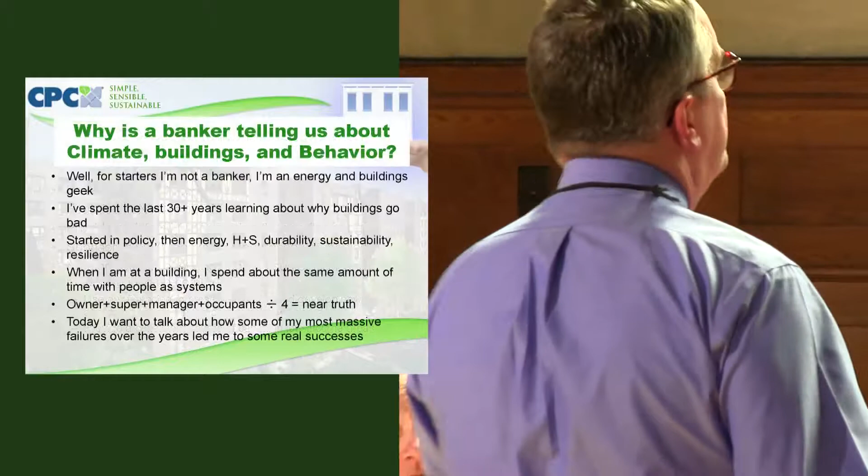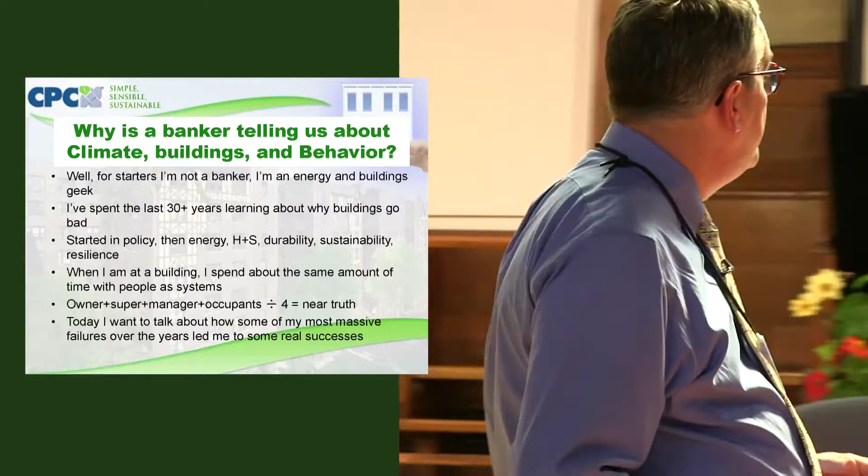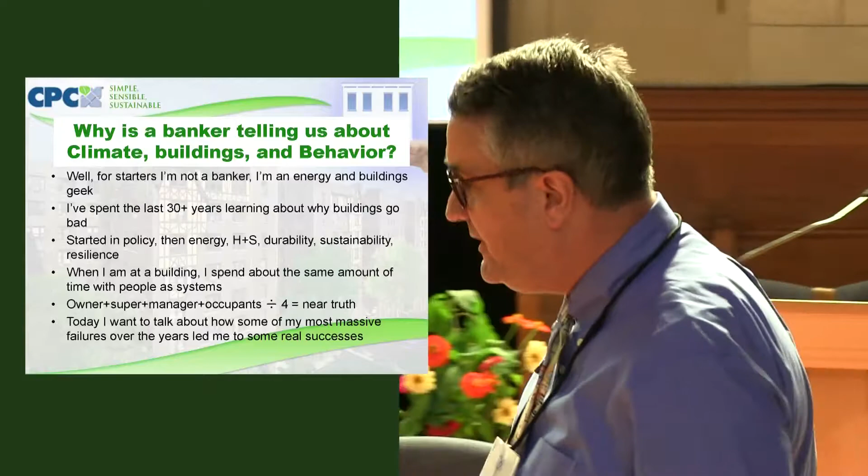So what's a banker doing here talking about climates and building and behavior? Well, I'm not a banker, I work for a bank, and everybody in the organization tells me I cannot call myself a banker. I've been crawling through buildings for about 33 years. I started doing stuff in policy for the city of New York, the mayor's office. I went from there to housing, and then someone started talking about health and safety. I said I can't do that stuff. They said, well, it's the most important thing we do. Then we went more into sustainability and durability. Now we have $60 million of Sandy money to spend, so I've got to learn resilience. It's been kind of beaten into me for the last 3 years by people.

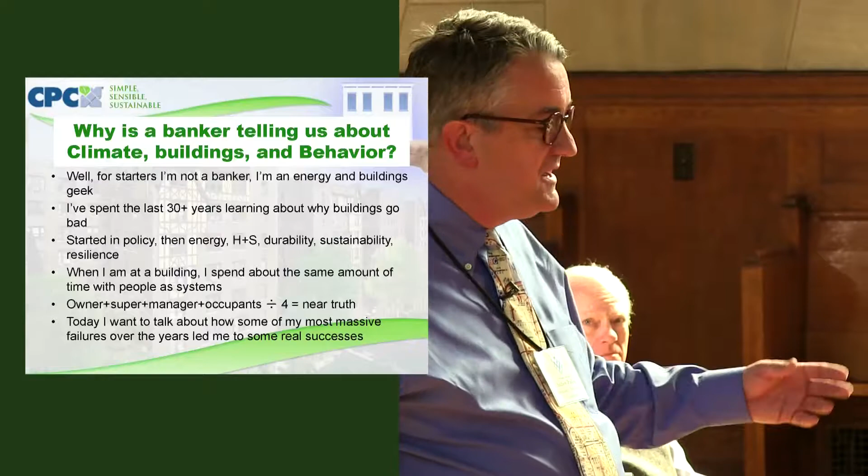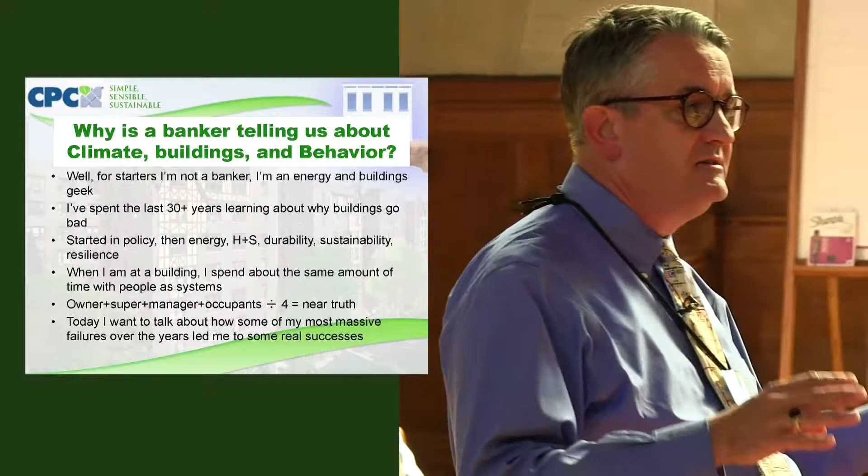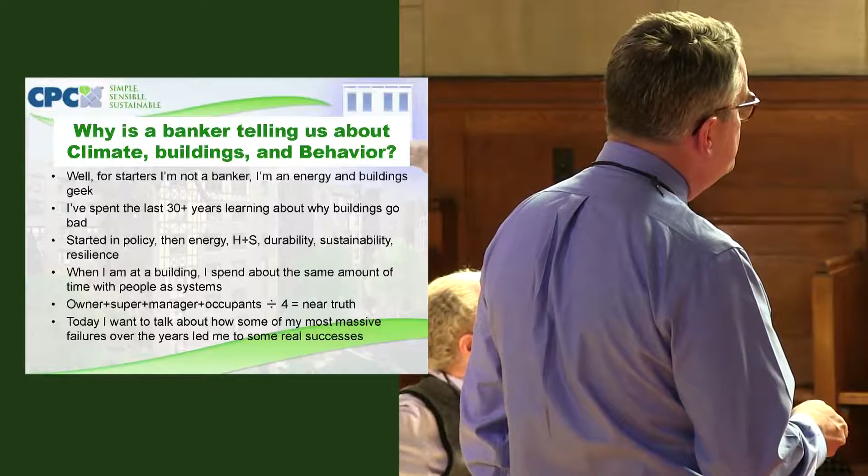So when I'm at a building, I spend about the same amount of time dealing with the building data as I do with the humans. I sometimes sit down with the humans at 10 o'clock in the morning and talk to them through lunch, because I want to find out what the owner, the manager, and everybody else is doing in the building. I find out that typically what the owner says, plus what the super says, plus what the manager says, plus what the occupants say, divided by 4, is pretty close to the truth. It's not really accurate, but it's not off by a mile.

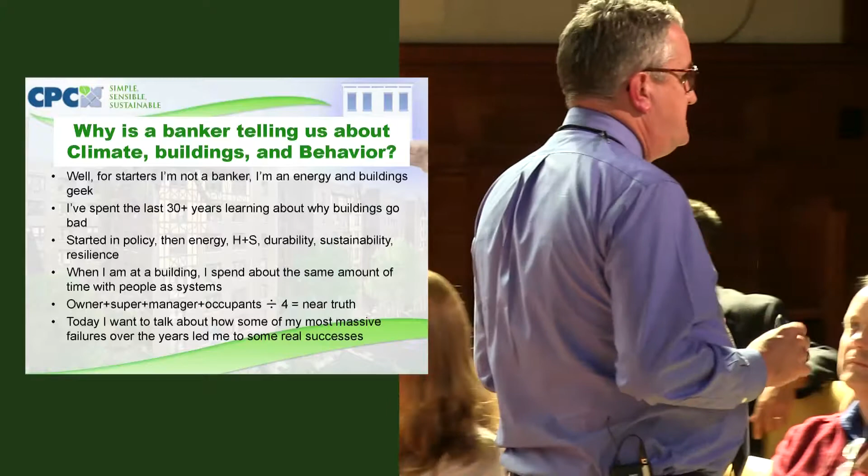So I want to talk to you today about some massive mistakes I've made over the years, and in doing them, how I learned to do things a little bit smarter. I've been communicating with owners and building managers and practitioners for over 30 years, and sometimes it's like dealing with the Three Stooges.

Owners want to know how objectively their buildings are doing compared to other buildings. If you tell them weird stuff, they don't want to know it. But if you can tell them that their next door neighbor uses half the energy that they do, they get it. If you ask an owner what they want, windows, they say, I want windows, and I want cash. The programs should just give me the cash I need, and I'll do the smart thing.

Don't worry, I know. They also want solar panels, ground source heat pumps, windmills, and things that have a 10 to 900 year payback. And they don't want to focus on the boring stuff, what one person called it to me one time.

So they need to be gently walked through their buildings. Like at a building on Central Park South that faced north and had a 30-story building behind it, the co-op board told me, I want solar and I want ground source heat pumps. I'm like, you've got steam, we've got to drill down to magma. They just don't get it. So we have to gently walk them around.

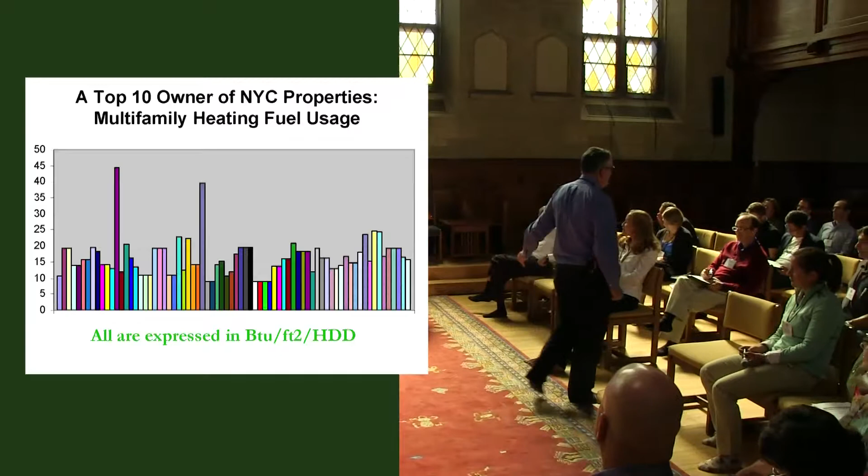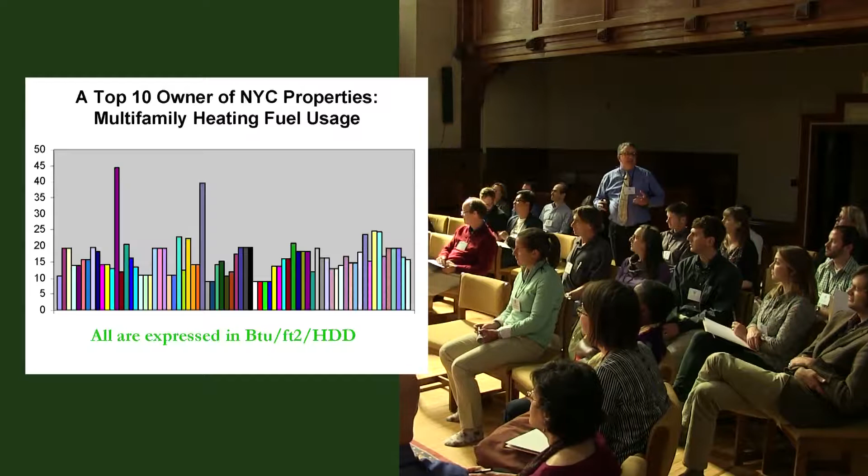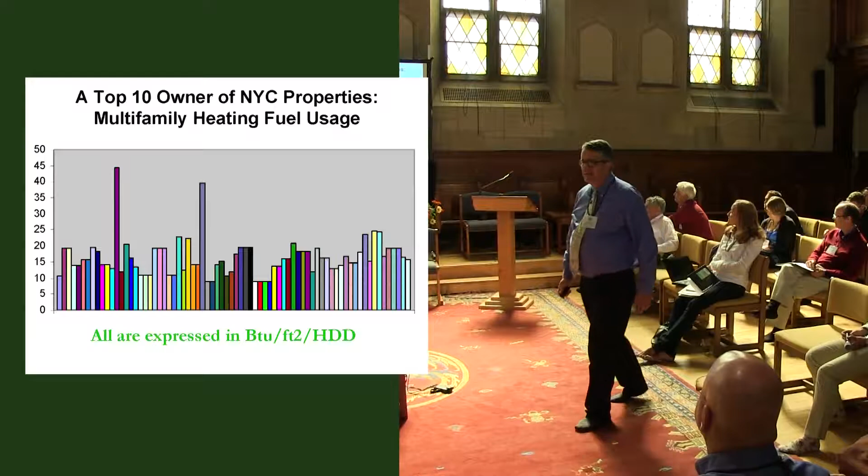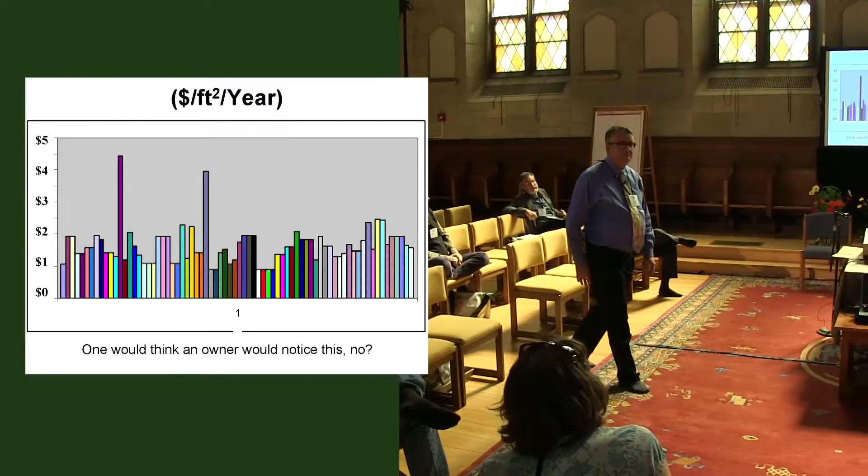This is one of the largest owners of property in New York City, and each one of these is just their multifamily buildings. Who is this owner? If you already know, don't answer. Guess. Someone said NYCHA -- good guess, not correct. It's not the city of New York. You know the answer, quit cheating. It is not related. How many people in this room went to Columbia University? Raise your hands. This is Columbia University. These are their multifamily buildings that they get green plaques all over, saying how fabulous their buildings are. Their buildings are pigs, because we looked at them.

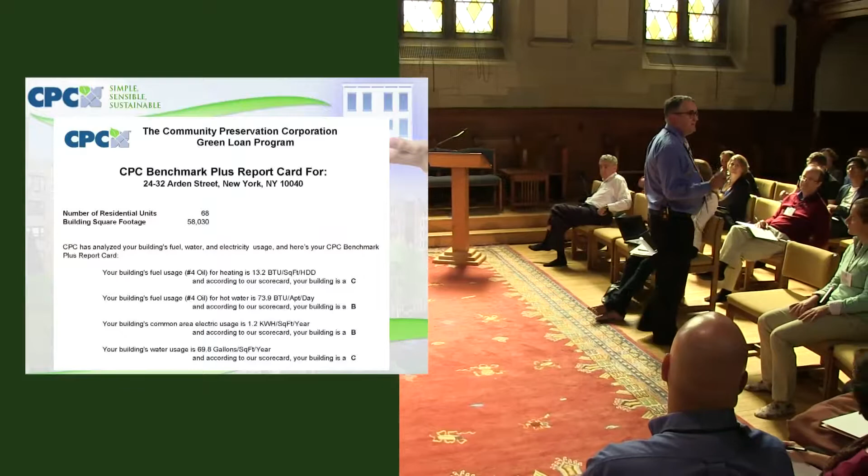I have a mortgage officer in my bank who said to me, if you say BTUs per square foot per heating degree day to me again, I'm going to kill you. He said, my kids come home and they give me a report card. Give me a report card. Tell me how I'm doing. Give me a grade. And so we gave grades.

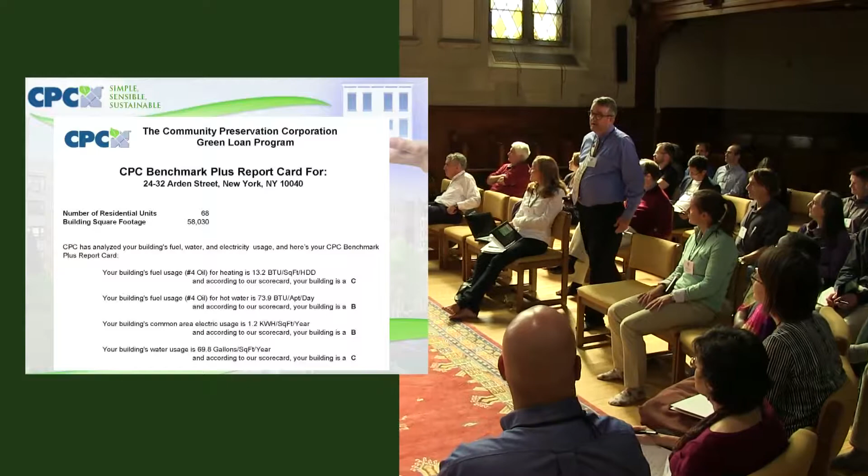When we analyze a building's fuel use, we give them this. It tells them their heating usage is a C, their fuel usage for hot water is a B, their common area electric usage is a B, and their water usage is a C. We're comparing them to thousands of similar buildings in New York City. And they get these grades and say, why did I get an F? Because your building isn't doing well.

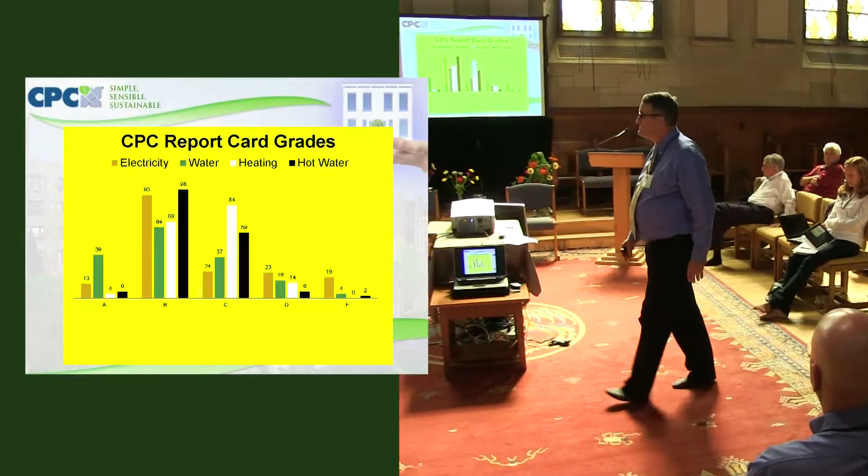Then we did benchmarking through the city of New York, Local Law 84. This is the results from 150, 200 buildings. Guess what? It's just like a curve. There's not many A's, there's a bunch of B's, a bunch of C's, a few D's, and a bunch of F's. This tells a building how they're doing.

So unless you let them know how you're doing, they don't have that feedback loop.

Feedback loop number 2: what goes on at a building in a typical day? Or, as I like to say, the beauty of an 8 a.m. building stroll with a clipboard when you have a 10 a.m. appointment with the owner. When I walk around a building 2 hours before the owner gets there with a clipboard, everybody comes out to talk to me. Who are you? What are you doing here? What can you tell me?

What's going on? The owner's a dirtbag. You hear everything. You hear about his wife. You hear about his father. You hear about his kids. You hear when the heat's off, what's going on. You get so much information.

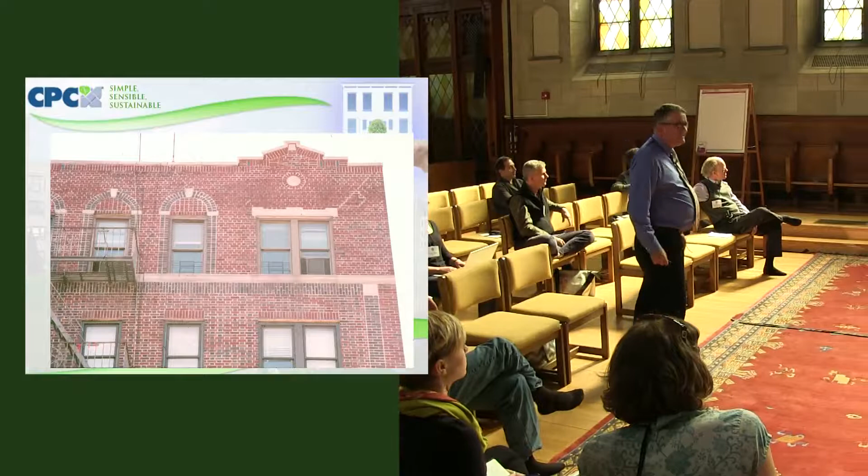And I collect all the data from the building. I measure the building, I measure the windows, I see what's going on. I see this: it's 20 degrees out, and not only is the window open, but there's a screen in it. I'm guessing they keep that window open a lot. These are the things you see.

There's 6 inches of snow that fell last night, but it's already melted on the roof vents, which are, by the way, designed to vent insulation, which is stupid. It's just a hole at the highest part of the building and probably vents most of the heat out of the building. That's just physics, and I don't want to confuse us all with physics today.

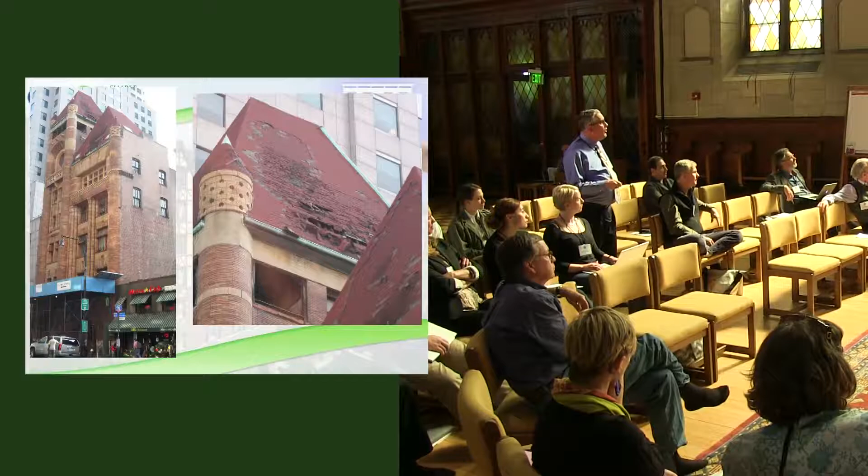You go to this beautiful historic building in Brooklyn that was the original firehouse, built to look out over the entire borough to see if any buildings were burning down, and this beautiful historic building is completely falling apart. All of the roof is going, and nobody looked at that.

You see a building near Fordham University, a beautiful building, but not only is the roof completely falling apart, as you can see on top, but again, on a cold winter day, all the windows are open on the top floor. People still have air conditioners installed in their apartments because that's the way they correct overheating, by opening the windows or turning on the air conditioner.

There's an emergency steam boiler in front of the building. They've been without steam, without a boiler, for 1.5 years and haven't fixed it. Yeah, that kind of jumps out at you.

So here's feedback loop number 3. Spend lots of time looking, talking to the staff, talking to the owner, talking to the tenants, talking to the manager, recording the data. But after you do something, get results.

I was always so impressed with myself. Oh, we did such great work. And then you go back to the buildings 3 years later, and we saved nothing. Well, why did we save nothing? We have to go back and find out.

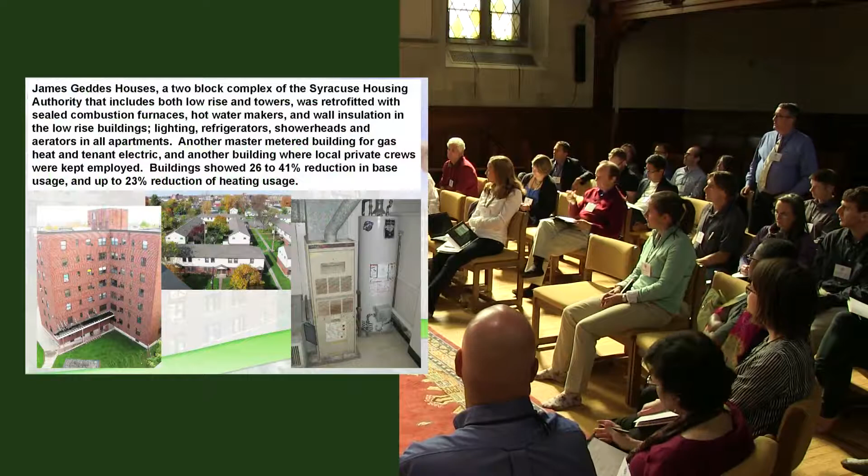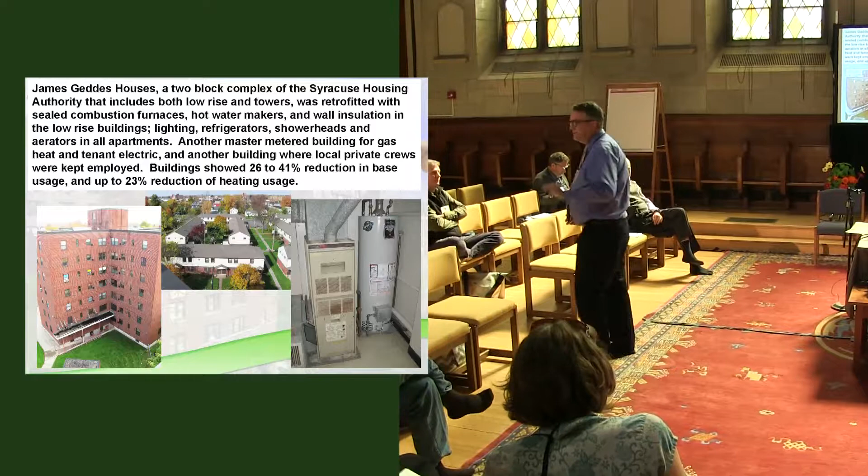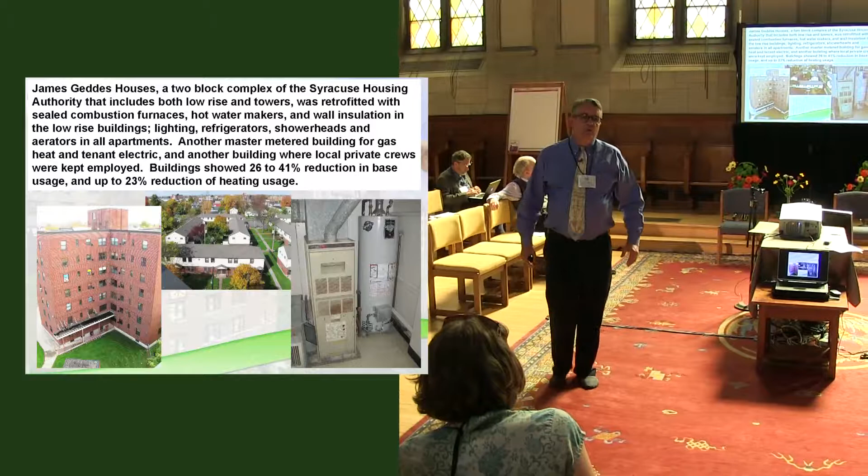So these are some buildings I want to show you quickly. This is the Syracuse Housing Authority. This ain't rich folk. We walked through this building with the Syracuse Housing Authority staff, crack staff — and I don't mean smoking crack, I mean really, really good at what they know. This is a 2-city block with big towers and little low-rise buildings, old furnaces and old hot water heaters. So we started walking around and seeing what we wanted to do.

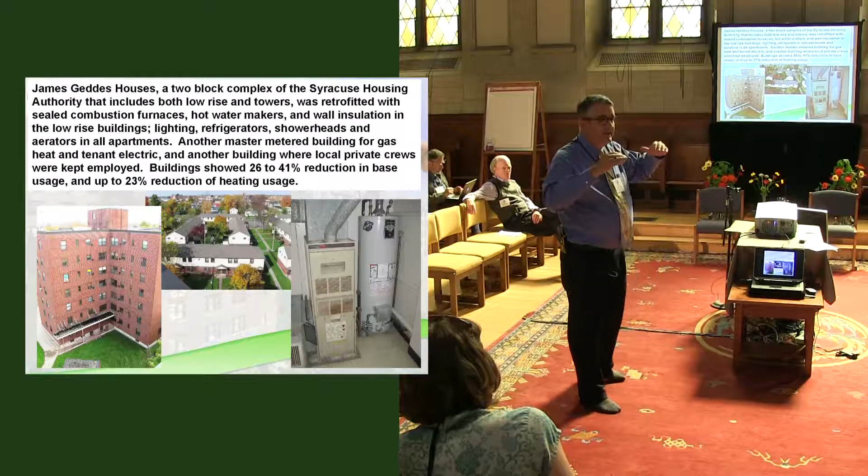So of course we're going to do new furnaces with sealed combustion, new hot water makers with sealed combustion, and wall insulation only in this upper part of the building. A person from the state came through because I saw this part of the building was brick, and I assumed it was brick behind, but they said no, it's frame behind there. So we insulated the upper half of the building. Maybe it's not perfect. We air sealed the attics.

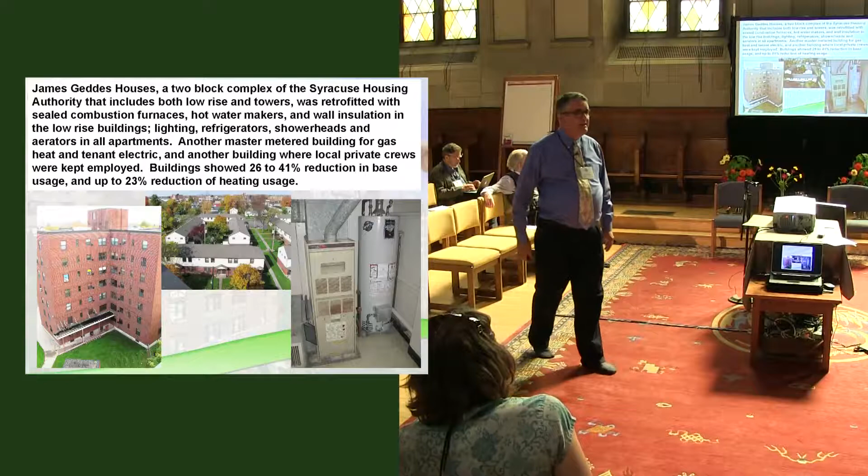We added insulation there. Again, this building is master metered for gas and electric for the entire block, so we don't know how individual buildings are doing. But we saw a 26 to 41% reduction in non-heating usage and a 23% reduction in heating usage in these buildings, doing a pretty inexpensive retrofit.

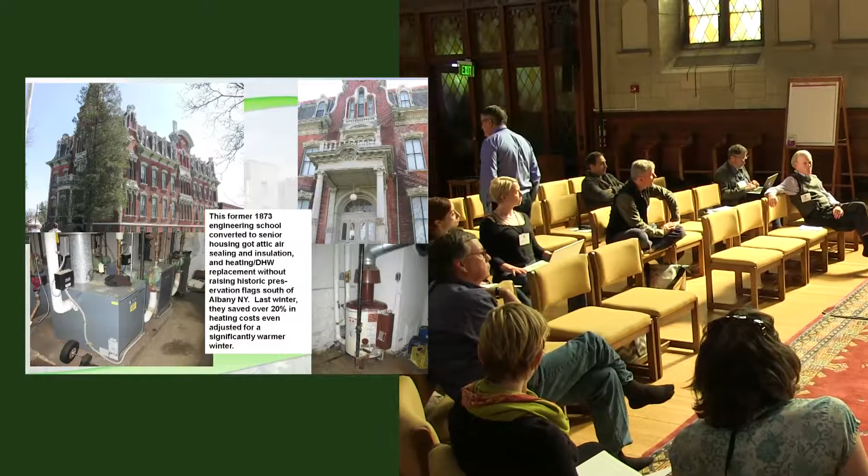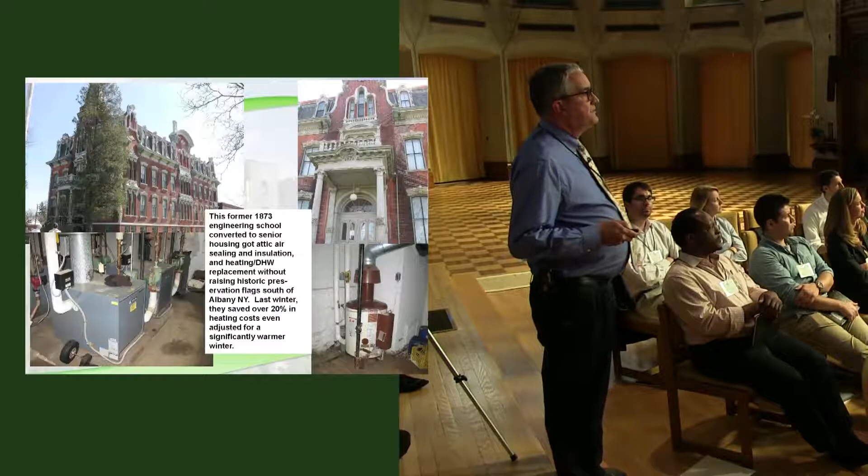People tell me you can't do anything with historic buildings. This building was built in 1873. It's an engineering school just south of here, built by a guy from Wall Street. For the record, people from Wall Street can't run schools. This engineering school went under in about 20 years, and everybody that grew up in this town went to 4th through 10th grade in this building. It's beautiful.

But the attic had never been insulated, ever. So we walked up into it, and I thought the New York Ballet Company had been through it, because it didn't have blown insulation, it had thrown insulation, just in places wherever they wanted to go.

So we had the attic air-sealed and insulated for the first time, and we replaced these boilers, which are called atmospheric gas boilers, designed by Satan himself. And whenever you see an atmospheric gas hot water heater, also designed by Satan, still specified by engineers, take them away.

We got 20% savings in this building by changing the boilers, insulating the attic, and walking away. And the historic preservation people said, you're not touching anything that makes us unhappy. You're fine, go. They were perfect with us. So historic buildings work.

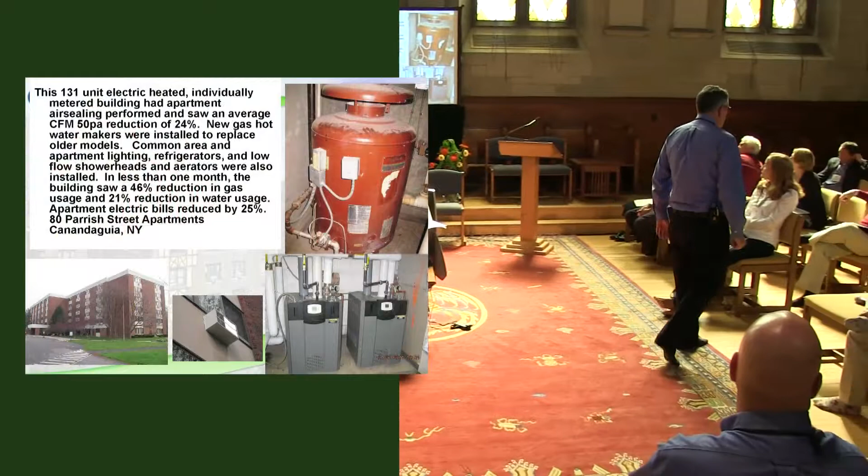Electrically heated, multi-family buildings, cold climate. Remember when they told us electricity was going to be too cheap to meter? Well, they were wrong. So there's electrically heated buildings all over the United States.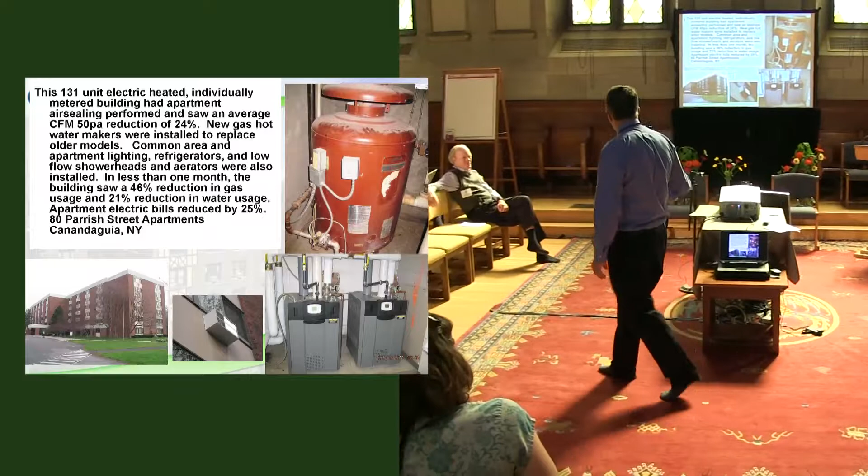This one had only gas for hot water, and they had this hot water maker, which was designed in 1940 and still used today. One of them died, and they put the exact same one in, because the rule is, in HUD and many other groups, replace with same.

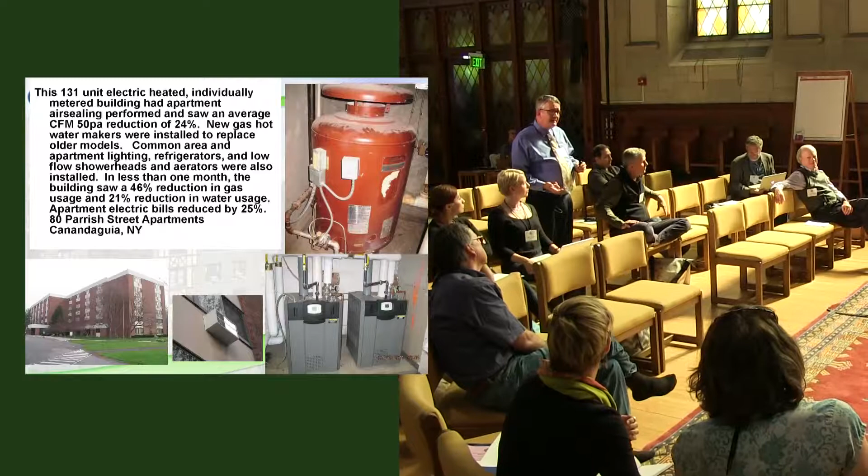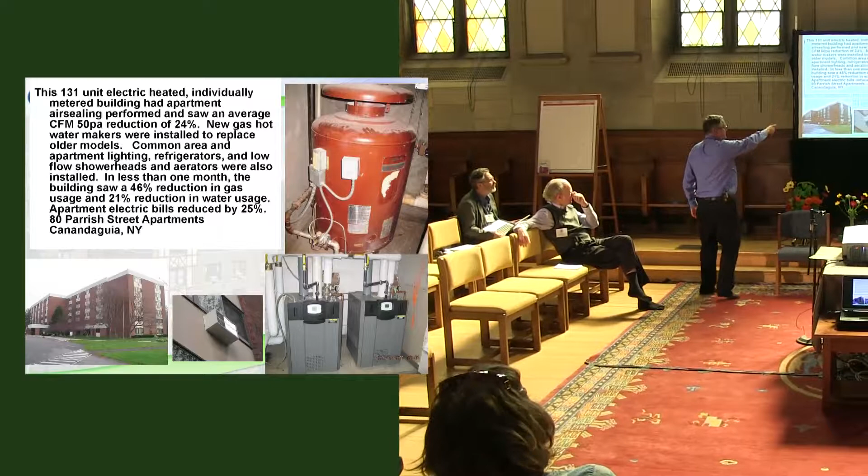It's like when the new iPhone comes out, do you get rid of your phone and get a rotary phone instead? Is that cool? I want people to start looking at the coolest thing to put in. We went from this water heater up here in the upper right corner to the super efficient ones in the bottom right corner.

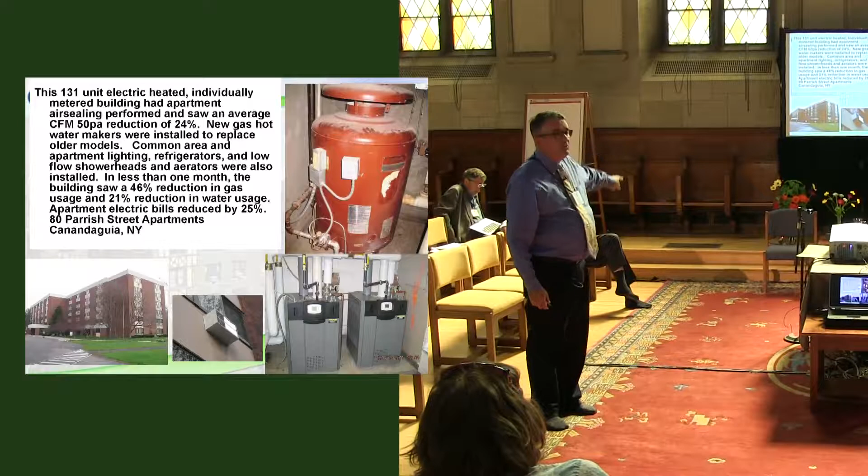46% reduction in gas in one month. And all we did was those two boilers, shower heads, and aerators. That's it. We had a 21% reduction in water, and we didn't do toilets. That's big money for this building.

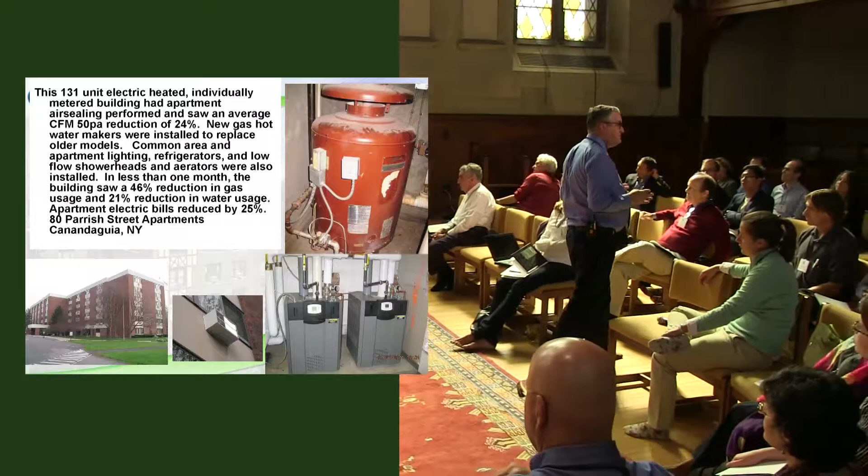We went in and put a blower door on every apartment, and we tightened every apartment on average by 24%. Their electric bills went down by 25%. I asked the inventor of the blower door, Gary, can we say that reducing air leakage by 25% saves 25%? And he said, of course you can.

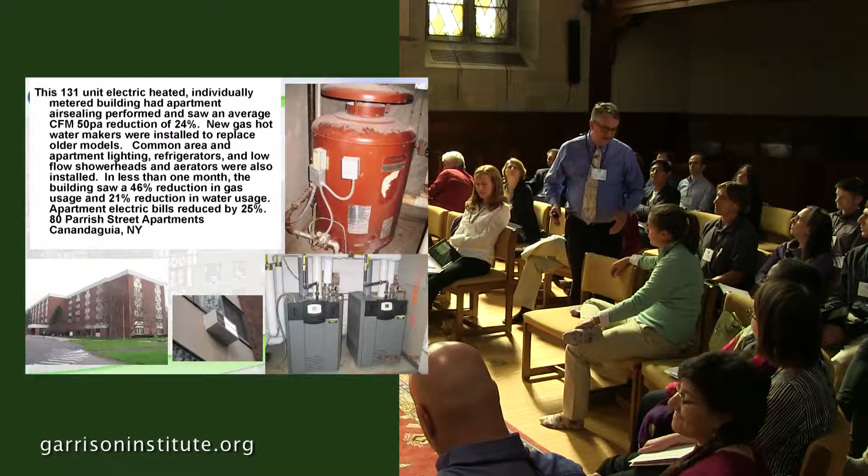And his scientific person next to him said, no, you can't say that, that's complete BS, don't say that. But it makes a difference.

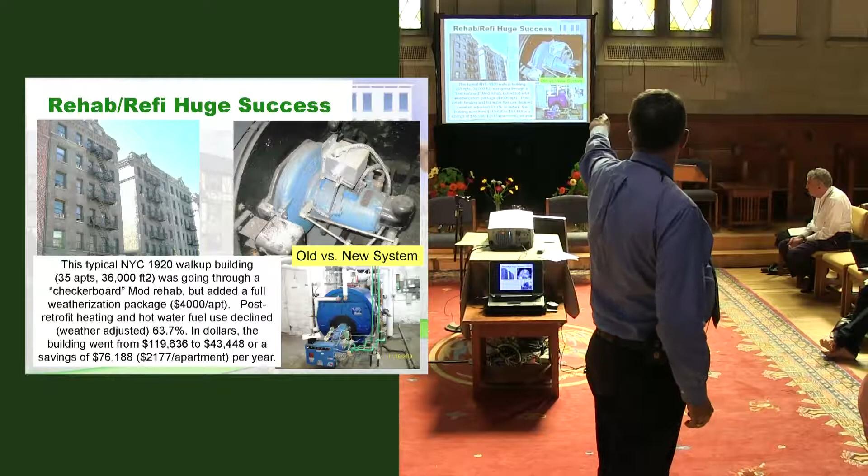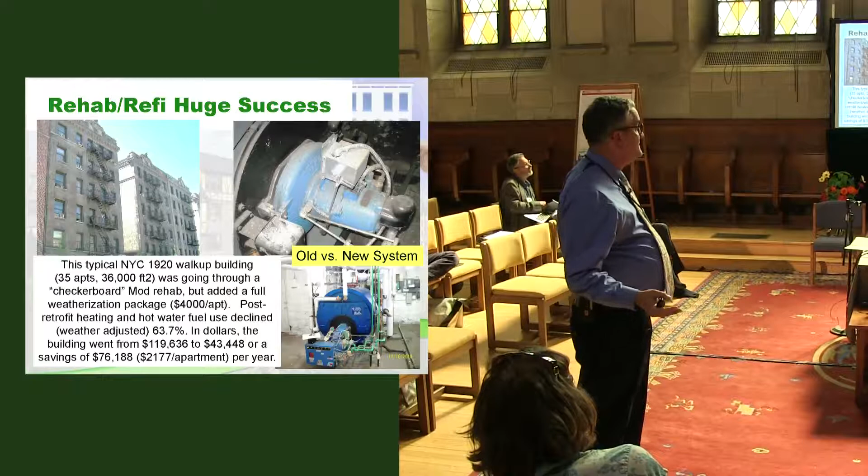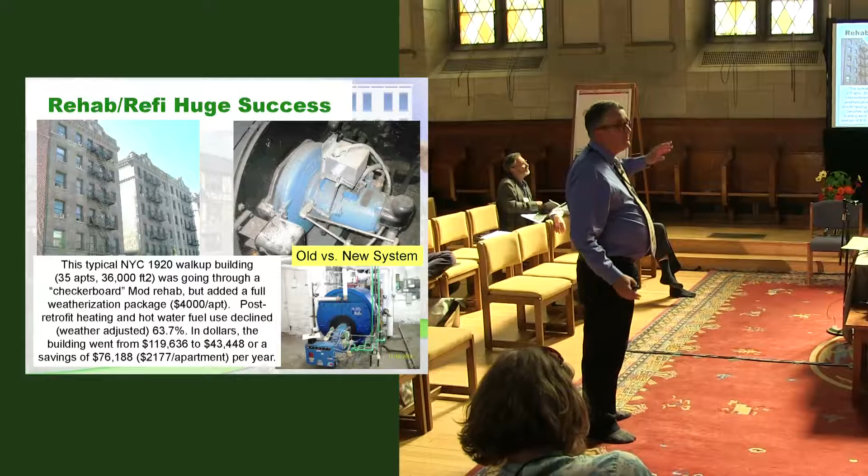I work for a bank. This is a refi job on a walk-up 1920 building in Upper Manhattan, and we brought in the local weatherization agency, the greatest weatherization agency in all of the United States, the greatest weatherization director, Dan Reber, Northern Manhattan Improvement Corporation. They walked through, and while we were doing the checkerboard rehab, they air sealed the apartments, put a new boiler in, put new windows in, installed right - they weren't cheap windows.

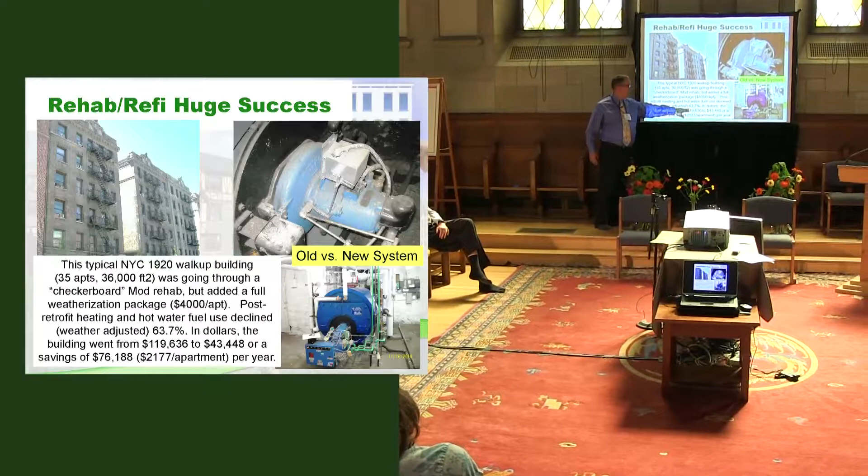I've got to show you this, because it's a real number. Heating and hot water fuel declined by 63.7%. In dollars, the building went from $119,000 to $43,000, a savings of $76,000, over $2,000 an apartment, on a $4,000 per apartment investment. If this wasn't a weatherization job, it would be called a deep energy retrofit.

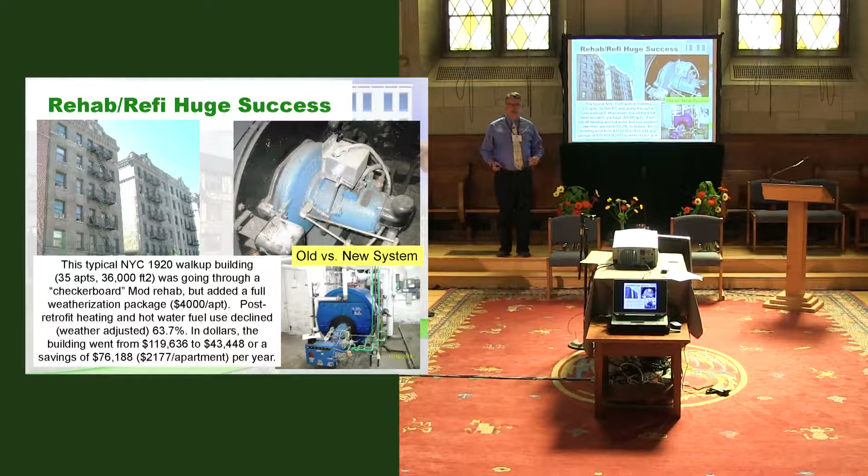It was a refi. And I work for a bank, and we think it's a really smart idea that when you refinance the debt on a building, that's the time you make the plan to do the energy stuff. Because that's when the wallet is open. When the wallet is open, do it.

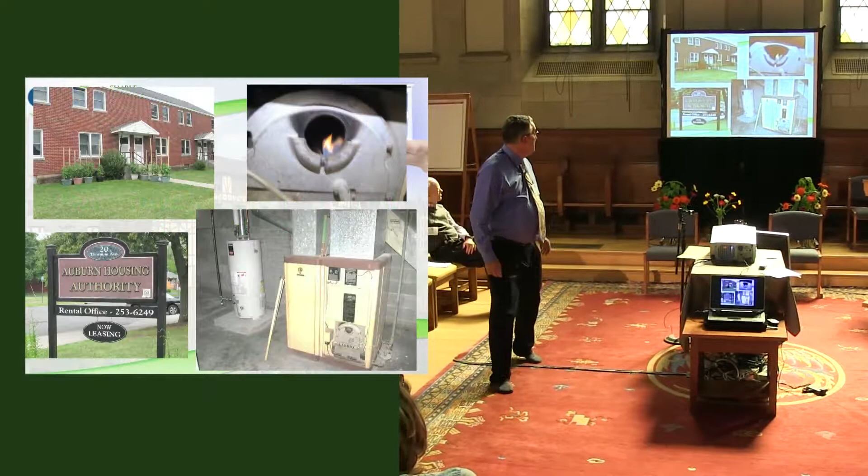But I don't want to talk about those buildings. I want to talk about the Auburn Housing Authority. Auburn, New York is one of the most beautiful cities in the world. It's in the middle of nowhere between Syracuse and Rochester, New York. It's gorgeous.

We walked through the buildings at the Auburn Housing Authority, and there were the original furnaces. They weren't hooked up to the return ducts at all, but they were hooked up to the supply duct. So they sucked air from the basement. They probably also sucked carbon monoxide and delivered it to people, but that's just technical stuff.

Who cares? If you look in there, that's the pilot light for this thing. I could have lit three cigars at once with that pilot light. It's gigantic. The buildings were built in an architecture style called early modern Eisenhower bomb shelter. That's this right here. Those of you that are elderly architects, you're responsible for this, and I don't forgive you.

Now, two days after a rainfall, I went into a lot of basements and saw wet basements. Well, upstate New York, I went to school at Syracuse, it's wet up there. Does anybody see something here that makes you think why you have wet basements? Anything that jumps out at you?

See this? The buildings don't have gutters. Nobody ever put them on in 55 years. Come on, that's easy, even I can figure that one out. So we wanted to do gutters. At 188 units, 31 buildings, but one gas meter, one electric meter, one water meter.

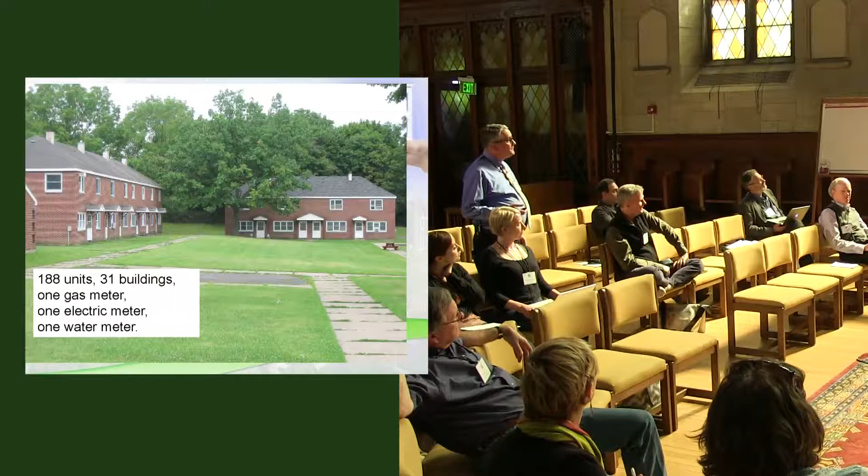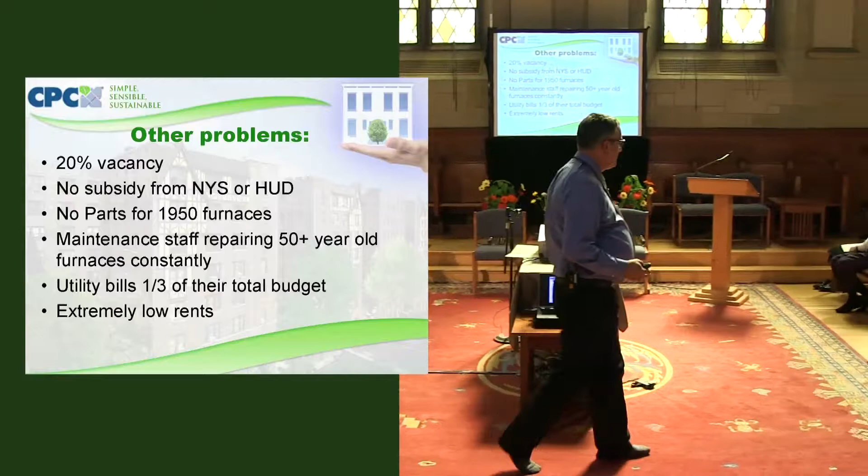And we put together what else was wrong at the building. 20% vacancy in a place that desperately needed affordable housing. Well, why was it 20% vacant? The place was a mess. Their energy bills were a third of all their financing. They were supervised by both HUD and the New York State Division of Housing, and neither one gave them subsidies. So they had to jump through all the hoops with none of the money, literally zero.

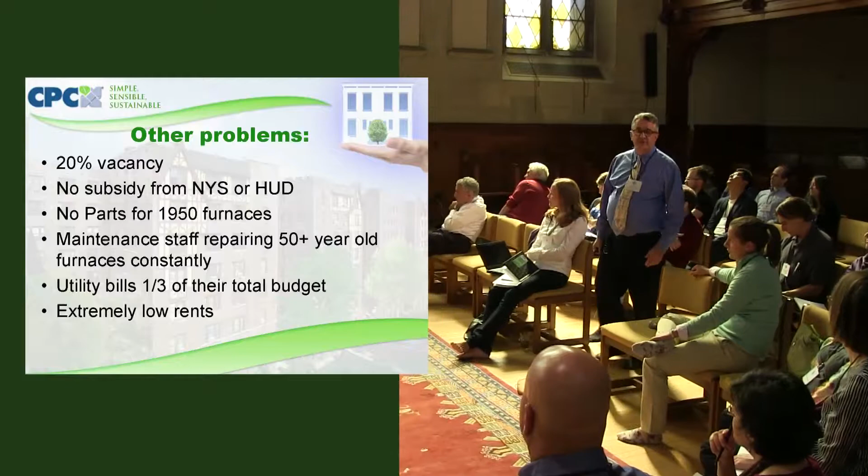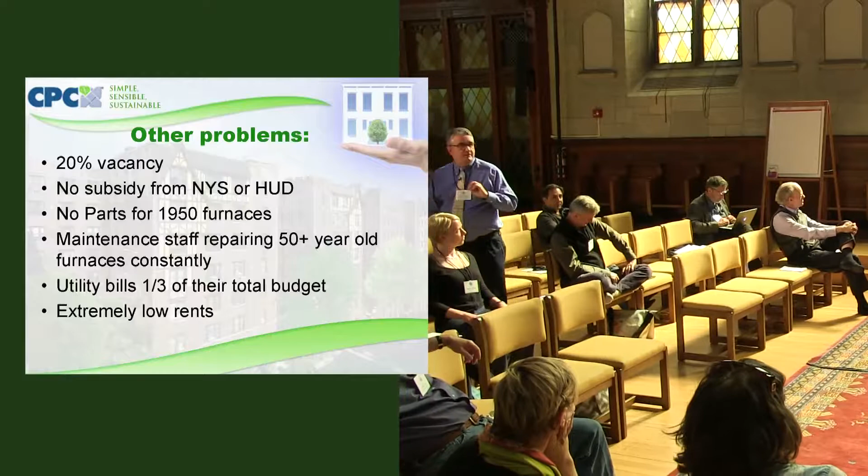The 1950 furnaces didn't have parts anymore, so they couldn't find them. The maintenance staff spent a large part of their time making parts for these 50-year-old furnaces to make them work. And again, extremely low rents and 20% vacancy.

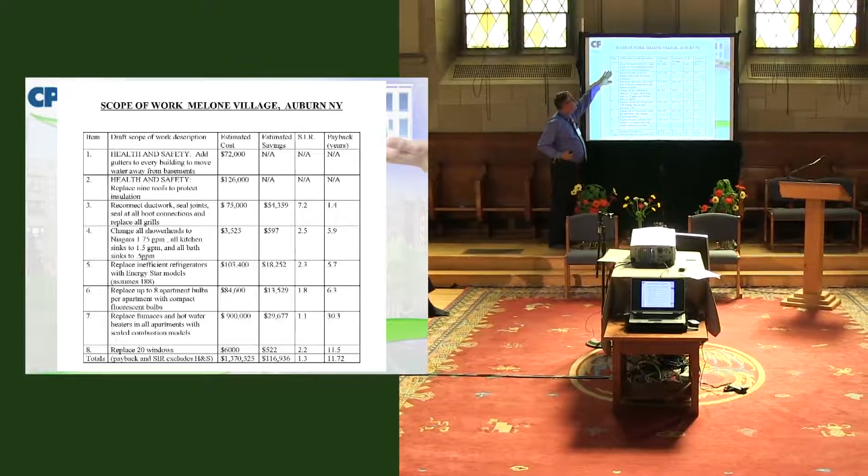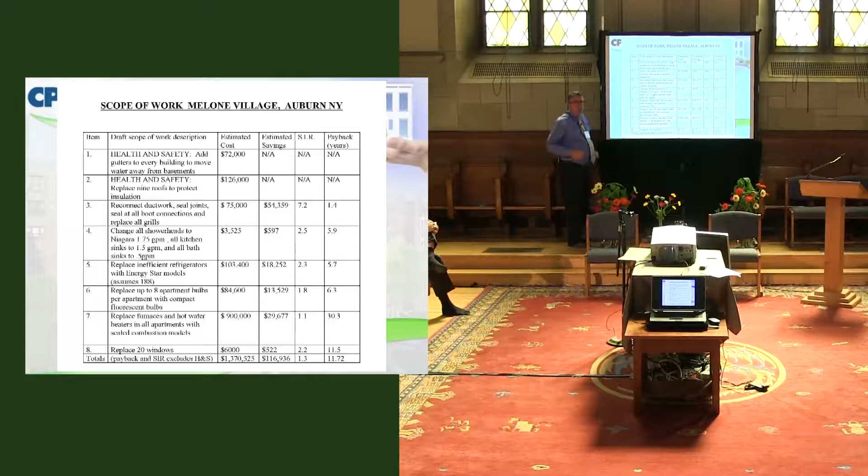This is as big as I could make this. But our scope of work, this was a weatherization job. We had a weatherization program, we were a bank that ran a weatherization program when the ARRA funding came in. So we said, add gutters, replace 9 of the roofs because they were leaking, reconnect the ductwork, change the shower heads, refrigerators, apartment bulbs, new furnaces, hot water heaters. And those of you that know cost effectiveness with weatherization, we got a savings to investment ratio of 1.1, investing $900,000 to replace 181 furnaces and 181 hot water heaters.

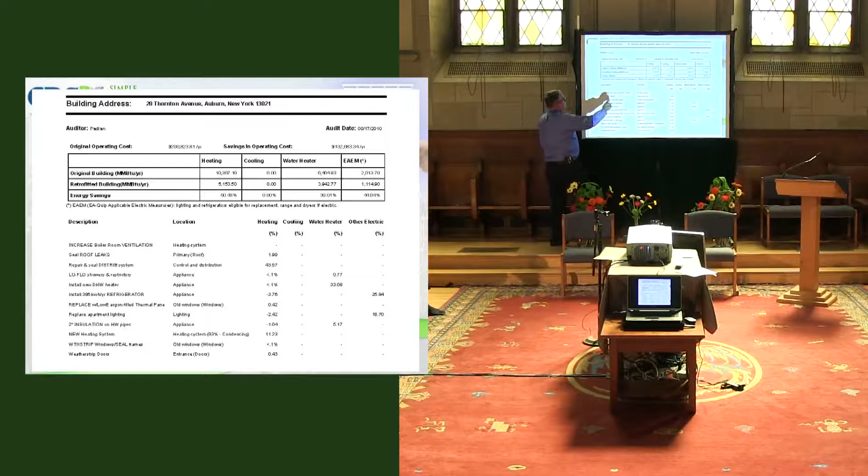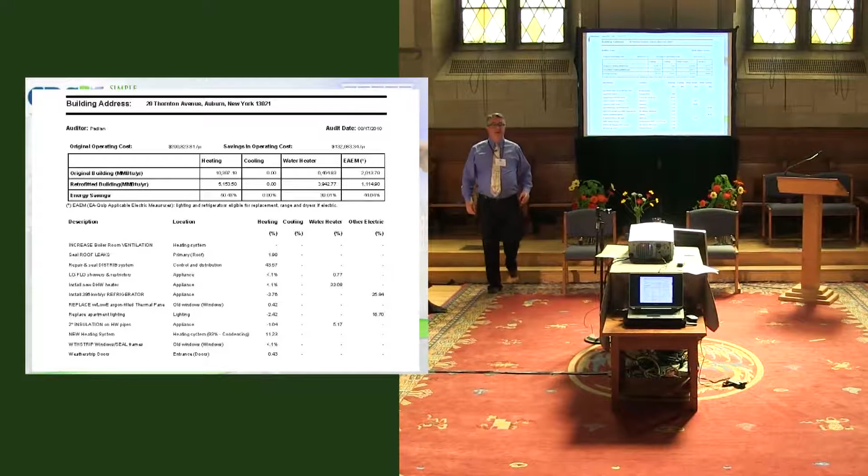Here's the scary thing. I finished the audit, and the building is actually pretty efficient. It was running at about 12 BTUs per square foot per heating degree day, but they told me we were going to reduce the heating usage by 50% and the hot water usage by 40% by doing these things. And I would not show these numbers to my supervisor because he's not with the company anymore. Because if we didn't reach those numbers, he was going to fire me. And he told me that.

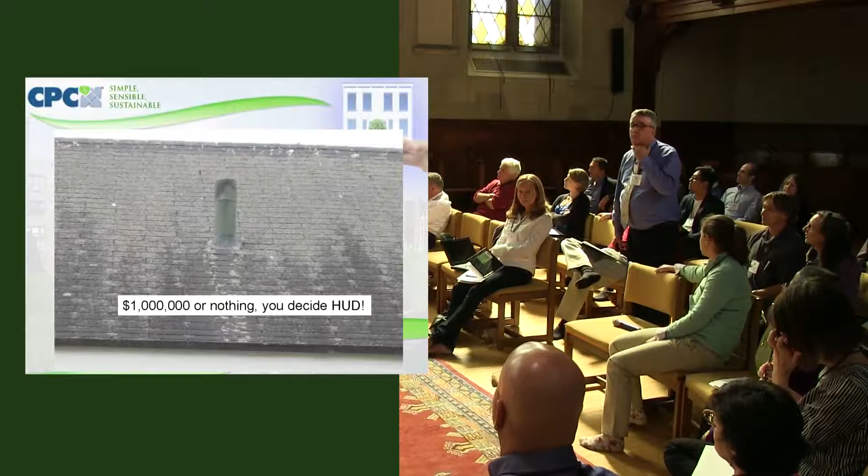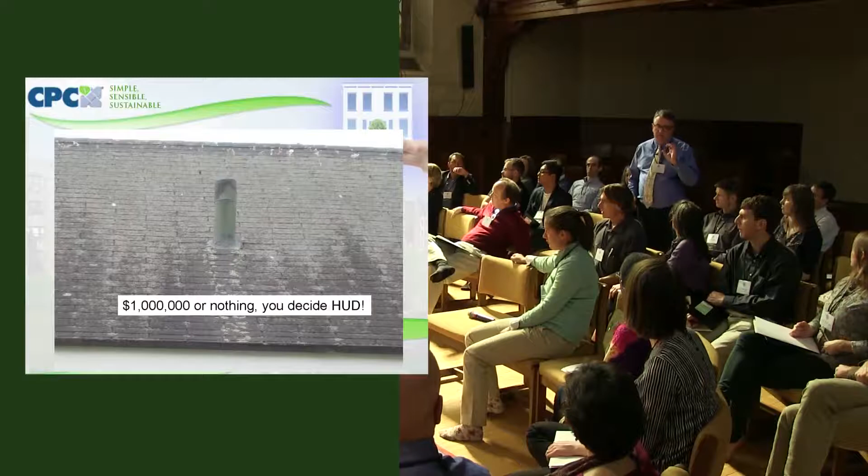The roofs were in terrible condition. And HUD wouldn't let the Housing Authority release the money that they had to replace the roofs. So we went to HUD's office in Buffalo, New York, and we said, okay, you either allow them to use the money that they have put aside to replace these roofs, or they will lose $1 million. They wrote the letter in two weeks. That's a record. For those of you that work with HUD, that's record time. So we said, it's either $1 million or nothing. You decide. And they moved.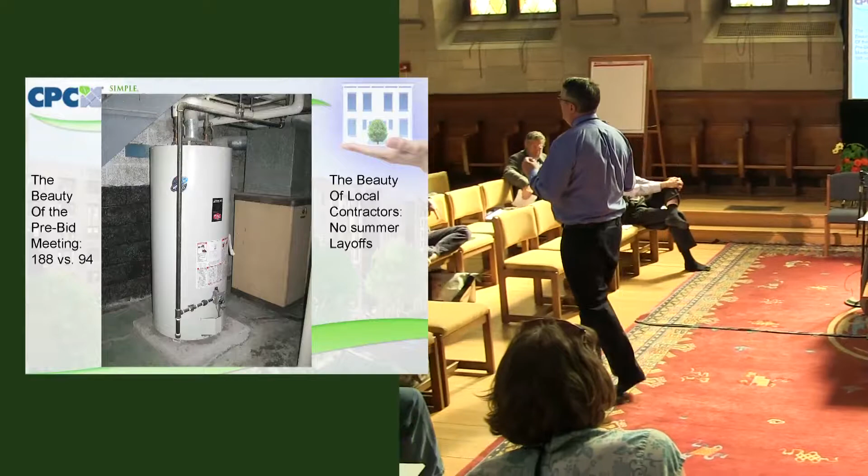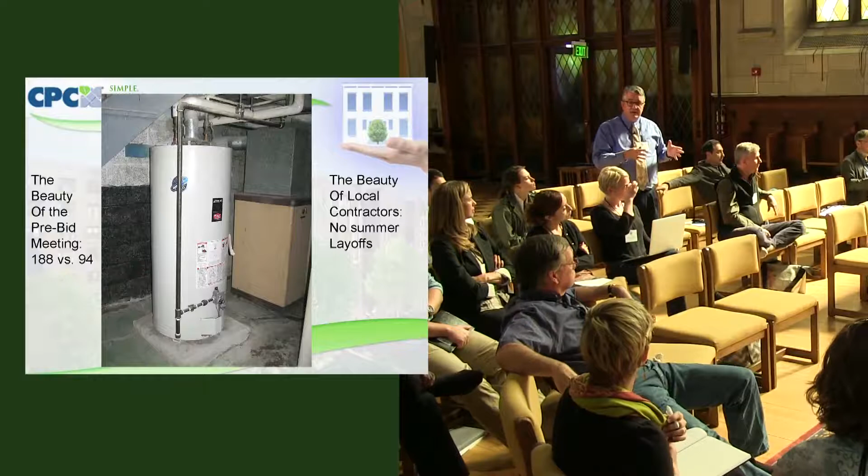Now I want to talk to you about the excellent feedback loop that many of you don't do, though I hope many of you do. It's called the pre-bid conference. We put out this meeting, and the only people that showed up were local contractors from less than 20 miles away, all of whom did furnaces and hot water heaters because it was just like houses, except there were 188 of them in one place, and we were all paying one bill.

One of the guys from the HVAC construction company said, what the hell are you doing putting in a separate hot water heater for everybody? Why don't you put one for every 2 apartments? You're going from a 50% efficient hot water heater to a 92% efficient hot water heater, and you can do it for half the money. And we're like, bingo. Saved us a ton of money.

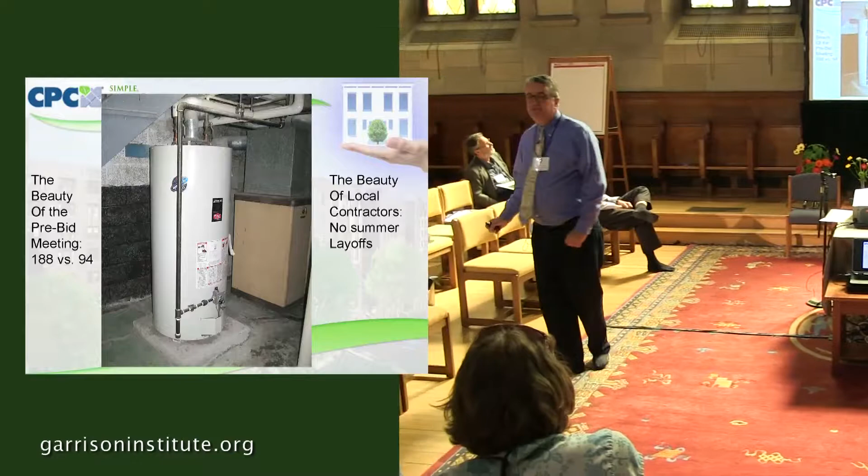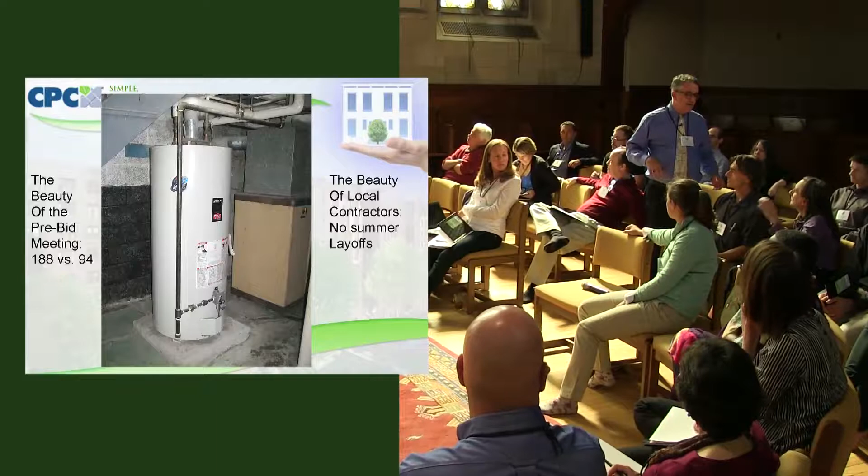So we split a water heater per every other apartment. And the beauty of this was that because we hired a local contractor, we put business back in Auburn, New York, which desperately needs it. And the crews that they would normally lay off in the summer, when they're not busy, they hired extra crews on. So we kept the city of Auburn busy in heating for the summer. That was good.

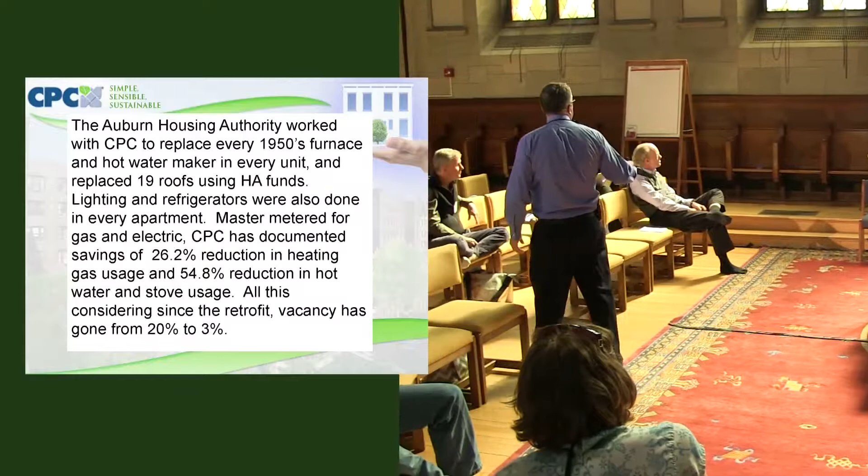We replaced all the furnaces, every hot water heater, 19 roofs, lighting and refrigerators. We documented a 26% reduction in heating usage and 54.8% reduction in hot water and stove use. We averaged out at about that 40-50% number for gas savings.

But during this retrofit, the vacancy rate went from 20% to 3%, and it's 0 now. So with the building getting more crowded, we still had great savings. This is such a home run.

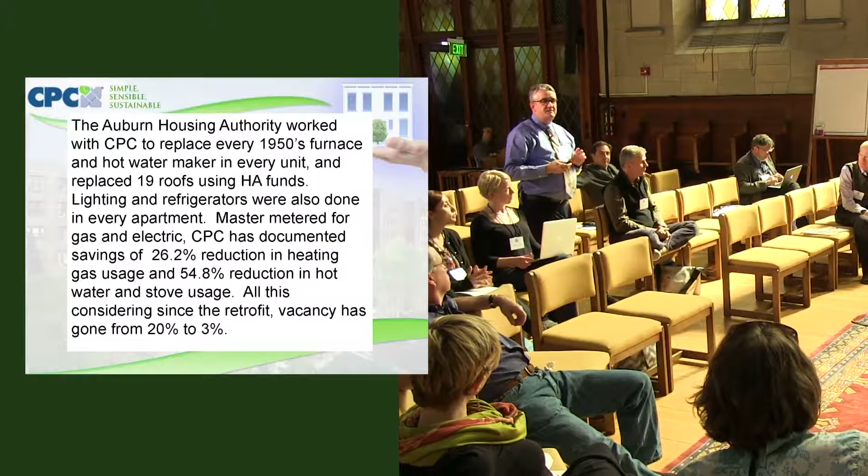Here's feedback loop number 4. You don't get these very often - this is a 2-page letter from the Auburn Housing Authority praising us to the nines, talking about how we changed the way they managed, how it got back into the community, how they did things differently.

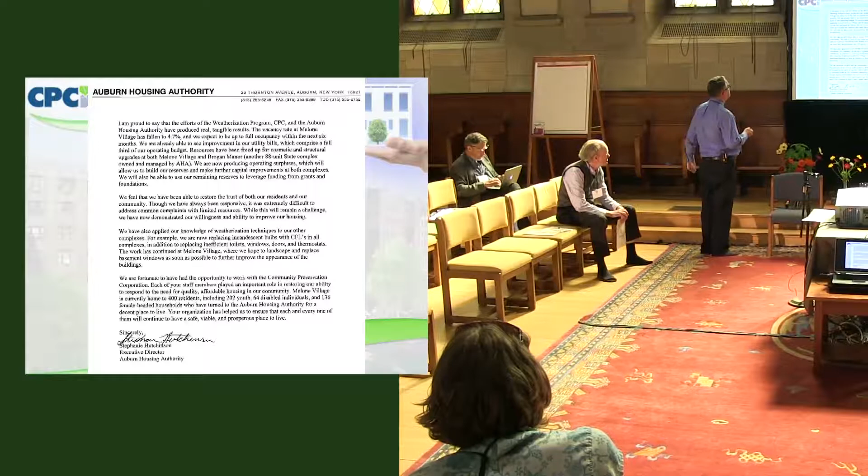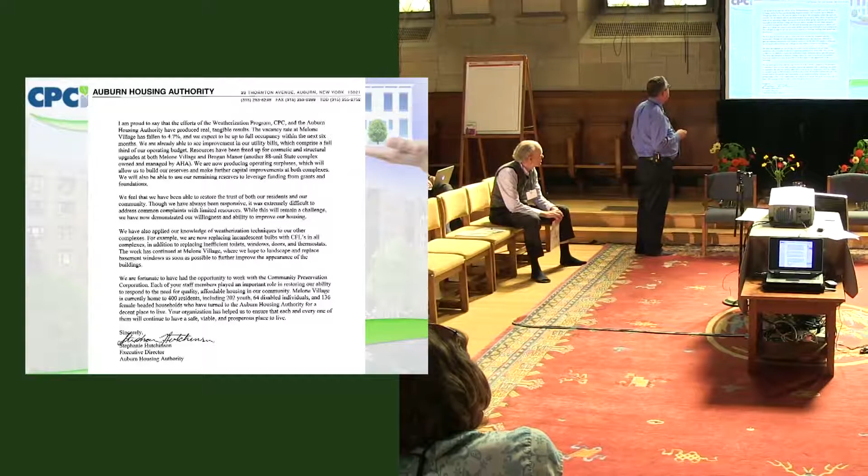We feel that we've been able to restore the trust of both our residents and community. Though we've always been responsive, it's extremely difficult to address common complaints with limited resources. While this will remain a challenge, we have now demonstrated our willingness and ability to improve our housing. This changed a housing authority with $4,000 a unit.

Feedback loop number 5, and the most important one - we got to fertilize the fields behind us.

My best mentor is a guy named John Tooley. In 1998, he told me we have to fertilize the fields behind us, and I'm like, what do you mean? He said, I'm going to be dead in 20 years, and nobody's going to do my work. And nobody's going to be doing our work in 20, 30, 40, 50, 60 years.

So last year I was here, and I work with a group called the Northeast Sustainable Energy Association. I'm on their board, and also Green Home NYC, which BOMI started, and I'm on their board. And I think the most important stuff we do there is pick up the kids and teach them how to do this stuff. Because if we don't grab the kids and help them get a job and make them better at what they do, we're dead.

So last year I was here - stand up, would you? And I met somebody who was washing dishes on the side and working like a dog and then running in here and taking notes at 100 miles an hour. This is Andrea, by the way. And I said, who are you? You can sit down now, I'm done making fun of you.

She said, I'm a multifamily building auditor. No you're not - I'm a multifamily building auditor. We talked for a little while, and within 2 months, she had a job with Jeff over here. And I know that she's really good at what she does because a few months later, Jeff just came to me out of the blue and said, thanks for sending us Andrea. She's great.